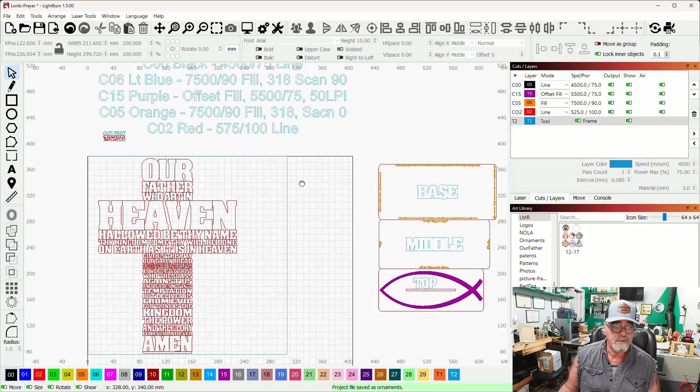Okay, so let's get started, and here we are in LightBurn, and this is the file that I was talking about. This is my save file. I put all of my notes in here. I've got my 3 parts over here, and the cross over here is the part that we're talking about. So you can see that there are different colored lines in here, different layers. Let me show you how I created this.

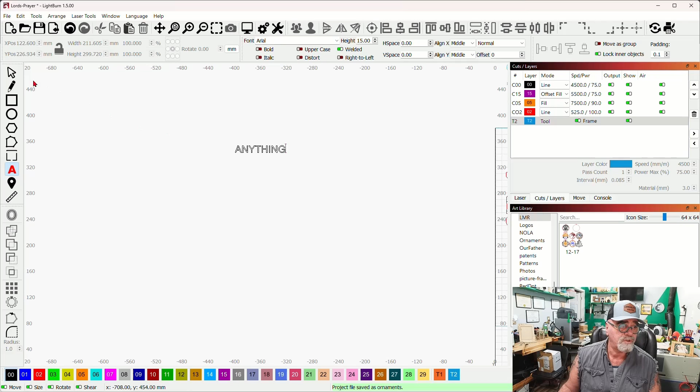So we'll move off over here. I don't actually want to open a new file, we'll just start with something else. And I'll grab my text tool and just type anything over here like that. The font that I used on this was, well, we'll just pick any one. I'll pick Anton, and let's make this a little bigger so you can see what I'm doing here.

So now we have a word, and obviously we can't cut this out. If we were to put this on our cut path, all of these letters would just fall out. So I'm going to select this word and come up here to the top, to horizontal spacing, right there. And I'm going to change this horizontal spacing by using the down arrow. Let's use the down arrow, and you'll see it's starting to shrink, and it will eventually weld.

And there you see that it's welded. But if you take a look right here, the H and the I have gone too far together. So in here is going to be an I. I'm just going to visualize that, and it's just a rectangle. So I'm going to put it back down like that, and now I have the entire word welded.

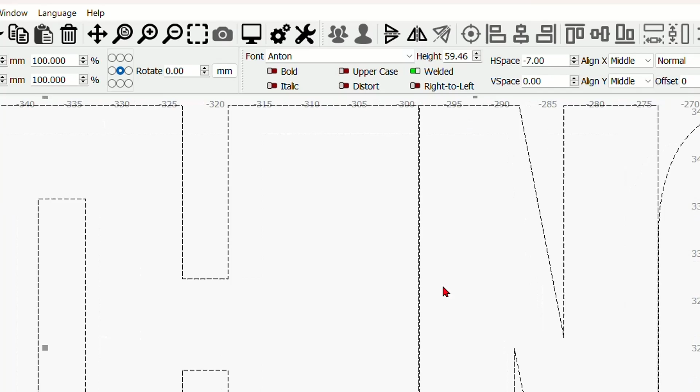But I want it to be more distinctive. So let's go ahead and make it more distinctive. Let's zoom in, let's see if we've gone far enough with the I. That will be a double cut right there, so that's no good. I have to go just a bit further, there we go, and I made a note that it's right about here is where the I is. So here comes the fun part.

So now let me put this on my cut path, because now you'll be able to see what I'm doing a little bit better. So what I have to do is now continue these letters and make it look like something you can read.

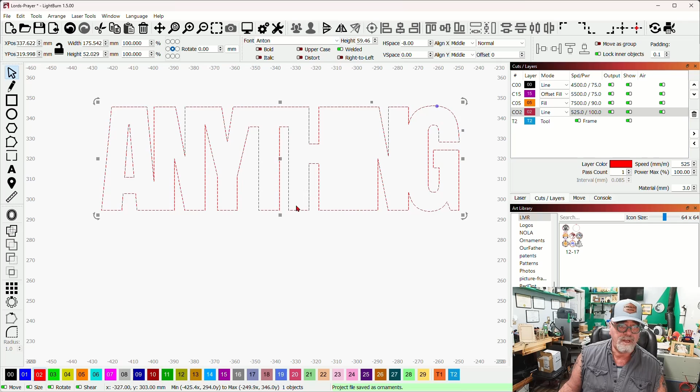So I'm going to come over here on the left side to Node Edit, and I'm going to click on Node Edit, and I'm going to just start adding nodes in here. The first thing I have to do, as you can see, there are no nodes. So I have to come up here to Edit at the top, and I have to convert this to a path, and then you'll see the nodes appear. And there they are. So now what I need to do is add my own nodes.

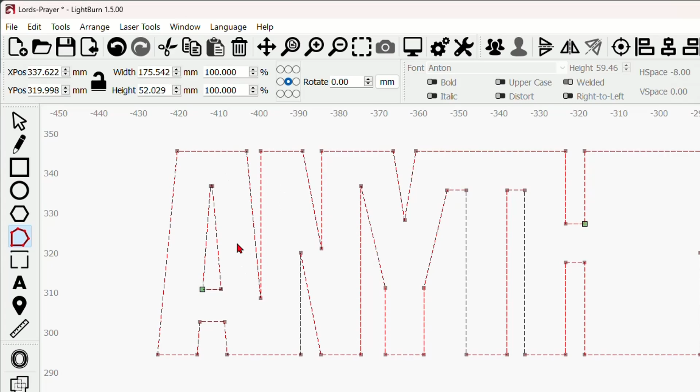So you'll see that the A stops right here. It's not actually an A. I'll zoom in, rolling my mouse wheel to zoom all the way in. And I will take the pencil tool up here on the top left, and I'll click on that, and I'll find the end of the A here. This doesn't really matter so much, because as long as you're close, that's all that matters.

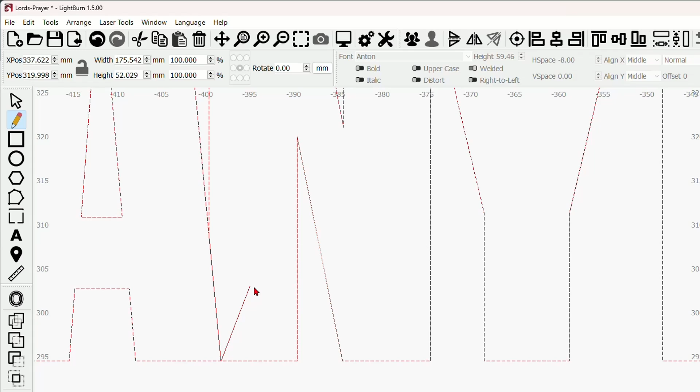And I'll come down here to the bottom. Did you see it snap to the bottom? It'll snap into a bunch of different places. And I want to make a straight line, so I'm going to click right there. Now I'm going to right click or press escape to get rid of the line tool. Now I can select that line and put it on another path, so we'll put it on the black path as an example.

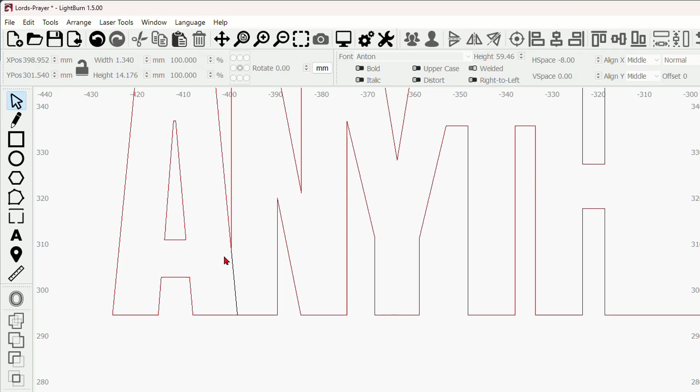Now I could have also extended the N instead. So you can do it either way. I could have extended the N, or I could have extended the A, so whichever way you want is fine. I think that the A should be a little more prominent in this one. But now let's keep going.

So if we zoom way in, we need another line over here. Back to the pencil tool. We're going to come to wait until it's a bullseye, click. And this time I want to make sure that it's perfectly straight, so I'm going to hold the Shift key. The Shift key will constrain it to go perfectly straight up and down or side to side. I'm going to click at the top and then right click to get rid of that line tool. And you see now we're getting distinct letters here.

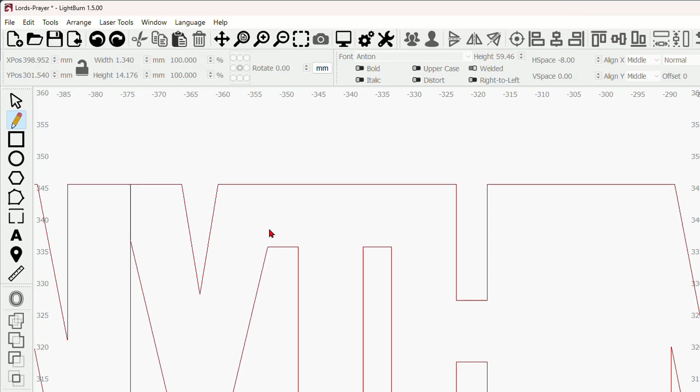And there are a couple more that have to be done. I'll do this as quickly as possible. We'll click on this one here. I'm not going to hold the Shift key. I'm going to click up there and right click to get rid of it. So now the Y is overlapping there.

I have to do the H like this. If I hold Shift, it'll constrain it. Click, right click. And now I also have to do the H over here.

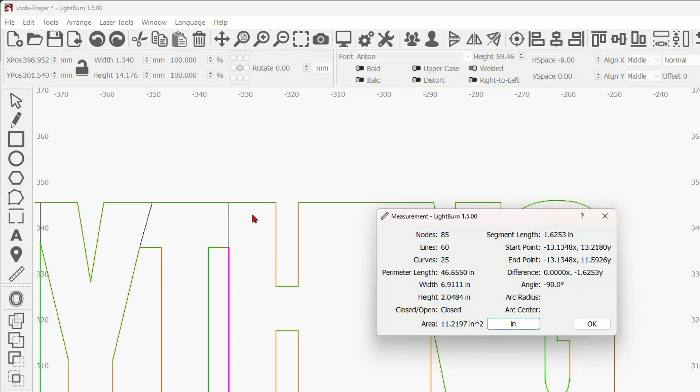So this becomes more of a guessing, I guess you'll call it a guessing. So we want to do about, if I measure this, we want to do about, let's see, from here to here, we want it to be about, let me put it back into millimeters, somewhere in the area of 10 millimeters. So say OK, all I'm going to do is draw a line up here, and then I'm going to select it.

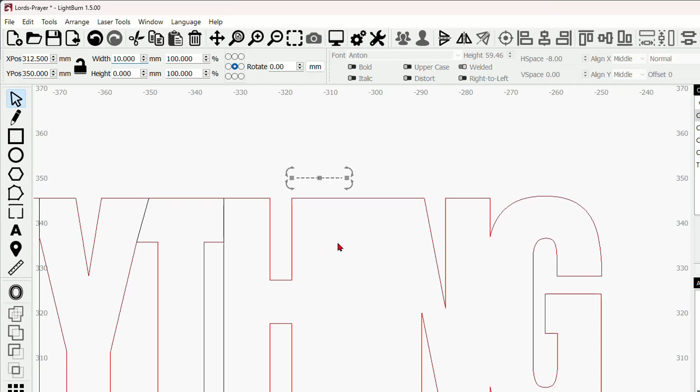I'm going to set this at 10... it's at 11 right now. Wow, that was pretty close. I'm going to set it at 10 millimeters. I'm going to use this as my guide, and I'll put this right up against the side of the H, so I know I'm making a perfect H.

Just to verify that, there's another way you can do it. You can come to the text tool and type the letter H like that. This is a secondary way you can do this, and you can drop this in right here and edit the nodes for it. So that's the second way. I'm just going to use the first way.

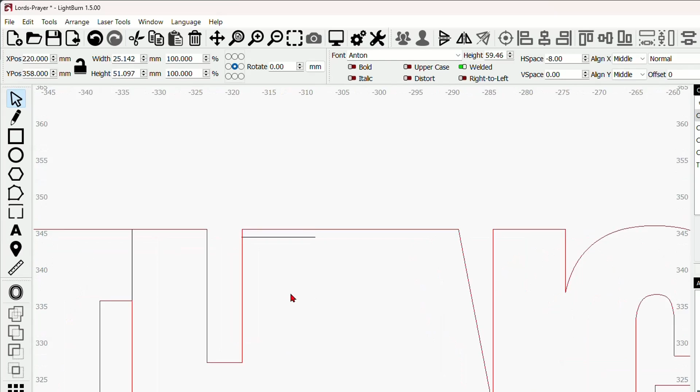I'll put that off to the side for now. So I'm going to zoom all the way in here, grab my pencil tool, and start right where that is, right there. I think that's about it right there. Now I'll zoom way out, drag the screen up by pressing the mouse wheel, hold shift to constrain it, come all the way to the bottom, click, and then right click to get rid of it. I don't need my spacer anymore because I know that's exactly where it's supposed to be.

So now we've defined that H. Now the next thing we need to do is the I. I'm going to guess that the I is going to be probably the same.

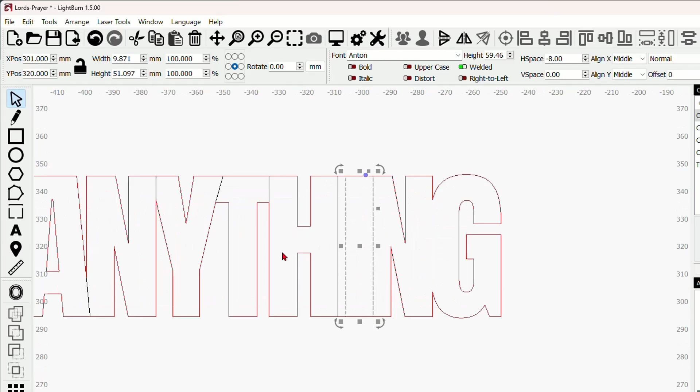Let me show you the other way to do this. We can just type the I like that, and then size it to the same size as this, which it already is because we're creating the same layers. At this point, you could theoretically dock this right up against that line. So if we grab the corner, we could snap it in just like that and leave it alone, and it'll just do two lines there, and that might be a good thing.

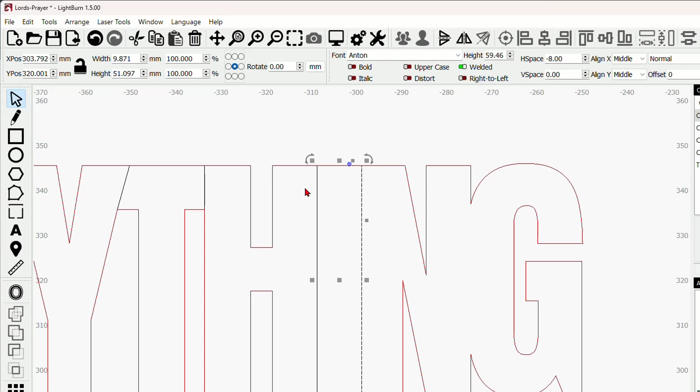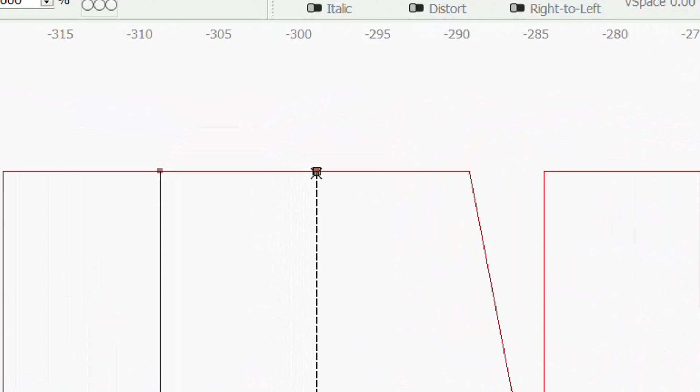But there's another way you can do this as well. You can come back to Node Edit, select the I, go to Edit, Convert to Path, and now you'll see here's our origin, and there are 4 nodes. So if I put my mouse directly over my origin, you see that node. Let me zoom in. If I press the letter B on the keyboard, it just broke that node.

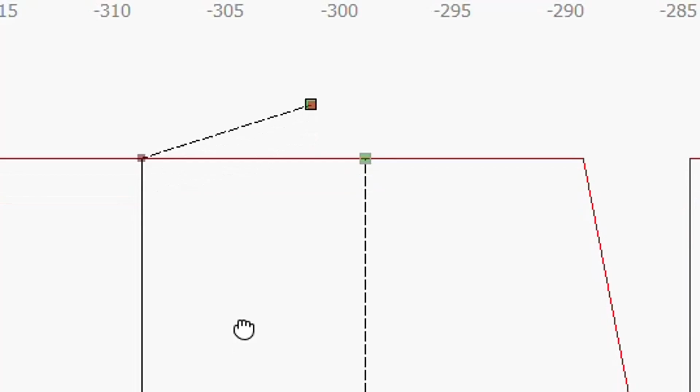So you see that? That node is broken. I can drag the other one off. And then if I come to the bottom and put my mouse over this one and press the B key on the keyboard, you'll see that this one has now broken. Let me just get this back in the right spot. So now all of these are broken.

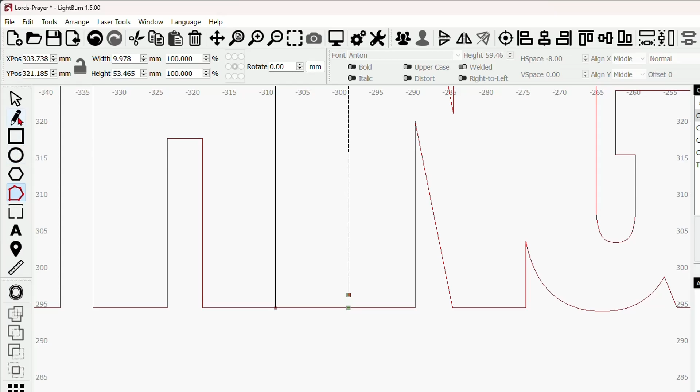I can get my selector tool, and they're all selected, so I don't want that. I just want these selected, and press the delete key. That's the second way you can do this. And here is where you might want to use an actual letter over on the end, but we're not going to.

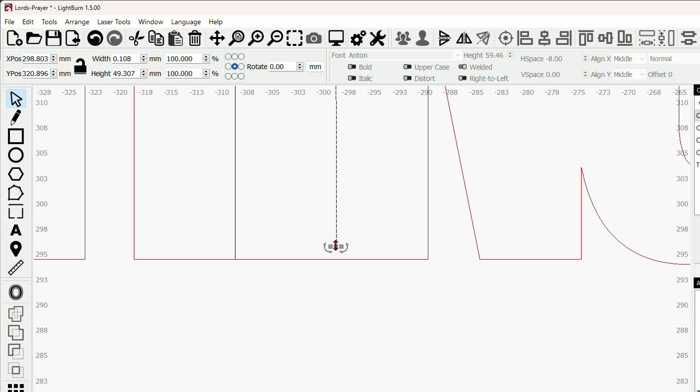So now I'm just going to select this one, grab the arrows, move it off to the side so I can see the line, and just extend it down to the bottom. So now we have an almost complete letter, and this was a good word to choose because typically right now you'd want to just do the N since we've done the right side of all of these, but I just want to show you how you do the rounded ones.

So I'll click over here with the pencil tool, come down to the bottom and click over there, and we'll pretend like we're doing the N, but we're really not. I'm going to select that one, come over to the Node Edit tool, and you'll see we now have the origin and the end. If I put my mouse anywhere over this line and press the M key, like Mary, it will put a node right directly in the middle.

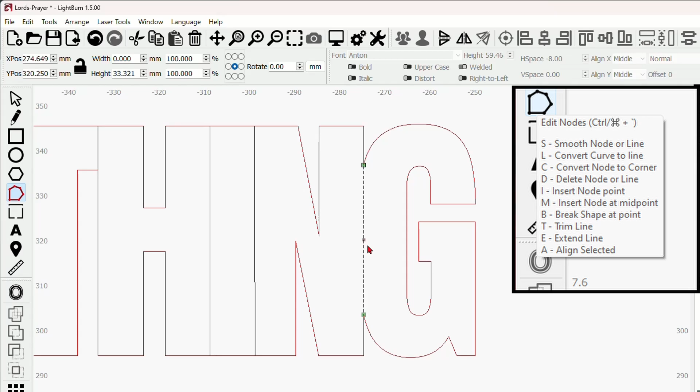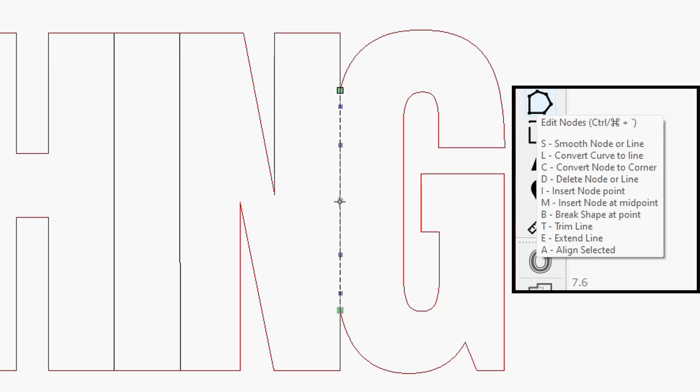Then if I put my mouse over that, I can press the S key. But you have to be careful here, because if you press S with your mouse here, it will only smooth this side. If you press S over here, it will only smooth from this node to this node. So you have to be directly over this one and press S, and that smooths everything. Now if I hold Control and grab this center node, I can shape my letter G, and however you think it's shaped, I think it's shaped something like that, right about there.

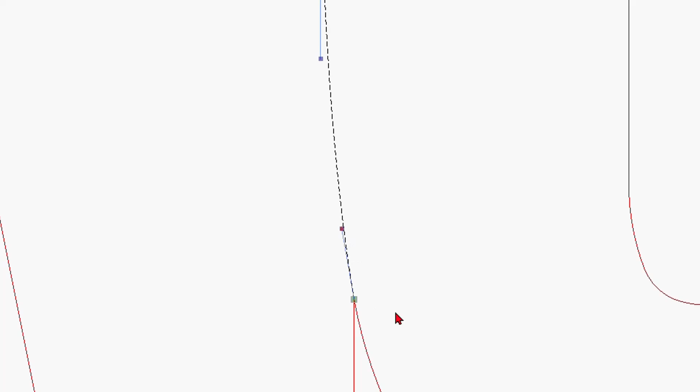I'm going to move these handles to make them a little smoother, even though this won't show up because it'll be such a small engraving. If we go to the selector tool, you can now see that we have the word anything that will actually be readable if you cut these letters out.

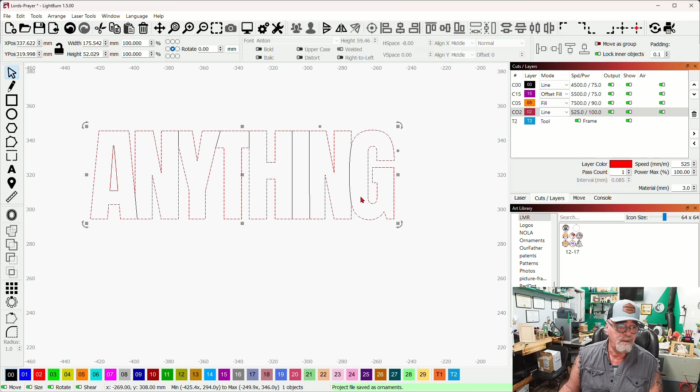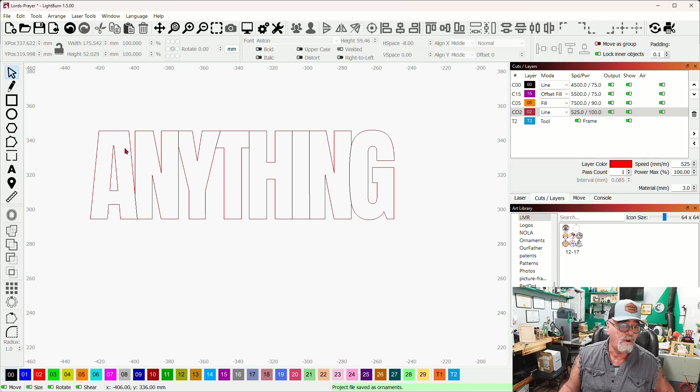So now this red line will do all of the cutting, and actually you want to have the black come first, do all of the engraving, and set the black layer to a pretty good speed and power. You want it to burn hot so that you get a good distinct line. The black line will burn all of those lines without cutting anything, and then the red layer will come back and cut everything out, and you will have one complete word that is welded together.

So now I know someone in the audience is going to point out that I did this wrong. I have the letters overlapping from left to right, and I did not do that with the T. So let's go ahead and fix that, because rather than get the comments, there are going to be people that are going to make this comment. So I'm going to fix this.

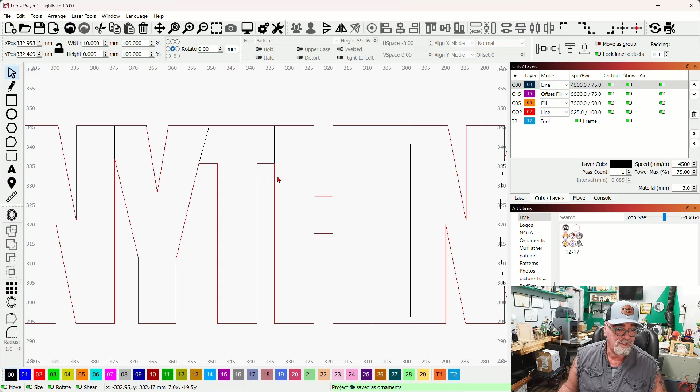I'm going to take my 10 millimeter line once again, and I'm going to draw it out right here. I'm going to select it, and set this to 10 because I know that's the width of the letters, and I'm going to use this one as my guide over here. And that is probably... no, it should be 10 millimeters. Well, you know what? This is not 10 millimeters.

So this would be a good case where I would take the letter T and use that. Oh, I see, it is an odd looking T. So I'll use the letter T as my guide this time instead, and I'll bring this in. Let me get rid of this one. And that is almost in the right spot.

As you can see, when I squish them, this is slightly different. So I'm going to hold Control and make this T the same size. Or actually, I don't have to hold Control, I'll just do this side first and this side second. And now I have the exact T that I was working with earlier.

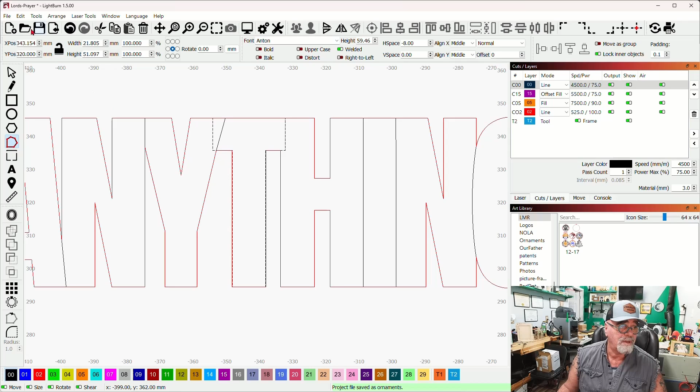So now I'm going to go back to Node Edit again. I'll go to Edit, Convert to Path, and there are my nodes right there. What I want is just this one node right here, so I'll put my mouse over that one and press the letter B to break that. I'll put my mouse over this one, press B to break that one too. Now I'll come back to the selector tool, select these, and delete them.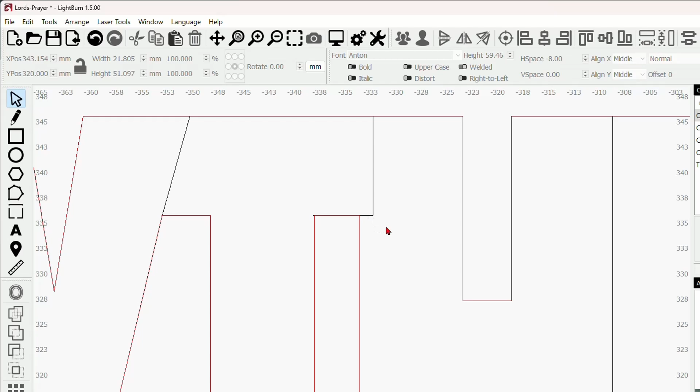And now I have what I was looking for there. So there is the actual T, and it's fixed, and now all of the letters overlap from left to right, which is the way it's supposed to be. And of course, over here, I just wanted to show you how this G works if you needed to do a smooth line, which in this case we didn't.

So what we wanted to do here was just extend this one down to here. And now that is the way that the letters should be done, with all of the letters overlapping from left to right. And I know that somebody was going to point that out, so that's the reason why I did it. And like I said, on the G, I just wanted to show you how to shape them.

Another thing too is that you can do lines like this one here, so let me show you that. You don't have to bring the letter in. So if I were to come to the line tool and start right here, now that I know about where it is, I can click there, hold Shift to constrain it, and come down to here.

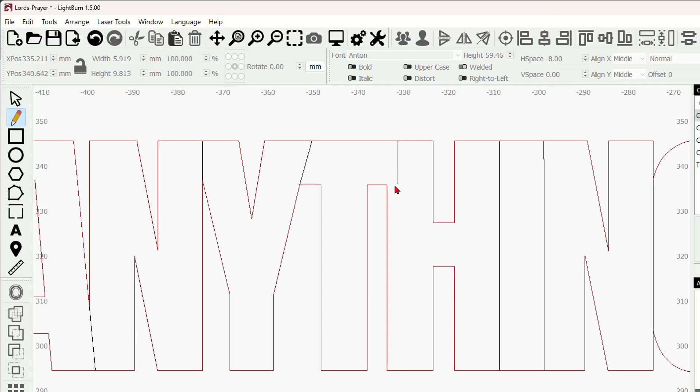Let me zoom in a little bit. I'm going to hold Shift and Control, and right about there I will click again, and now I can come over here and click again. So you can keep clicking and get the same results if you know where it's supposed to be. So the way that the line tool works is wherever you click, it creates a point, a node.

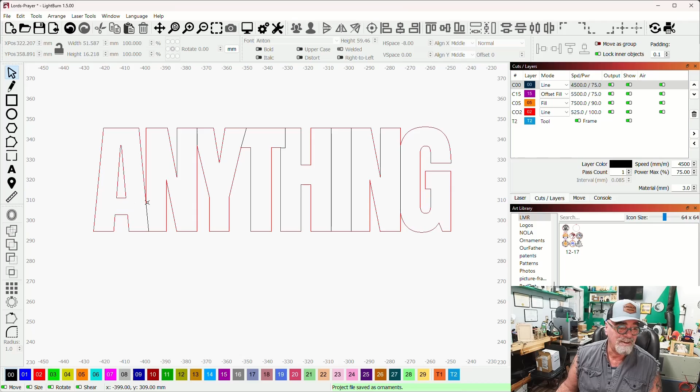So you can do this any way that you want, and you can actually click and drag as well and do some really cool things with the pencil tool. I just wanted to point that out because I knew that one of you, my viewers, are very astute to things like this. So now every letter overlaps from left to right, which is the way that this is supposed to be.

Okay, with all of that said, I want to jump back over to the file and show you a little bit more about this file that you can get at my store, engraveandcutfiles.com. Let's jump over into LightBurn real quick.

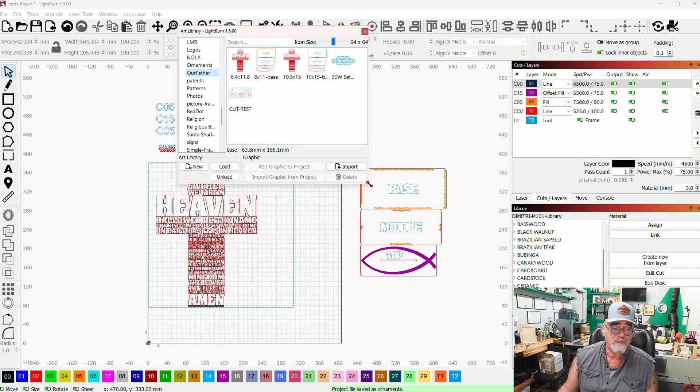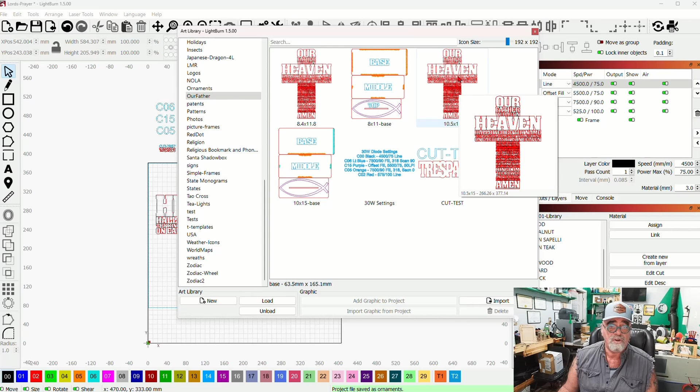I have created an art library called Our Father, and in this library are all of the files. We've got the 8 by 11 file, with the base, the middle, and the top, designed for 3mm wood. We've got the 15-inch, the 10 by 15, which will fit on all 400 by 400 or larger lasers, or even some smaller.

And we've got the base for the 15-inch over here. The only difference is that the line in the middle here is a different width, that's all. Then I've got the settings, which were for me personally for the 30-watt diode laser, and I cut back the speed quite a bit.

I would also suggest that whatever cut speed your laser can cut at, this particular laser was able to cut 3mm wood at about 750, and I scaled that cut layer way back to 575.

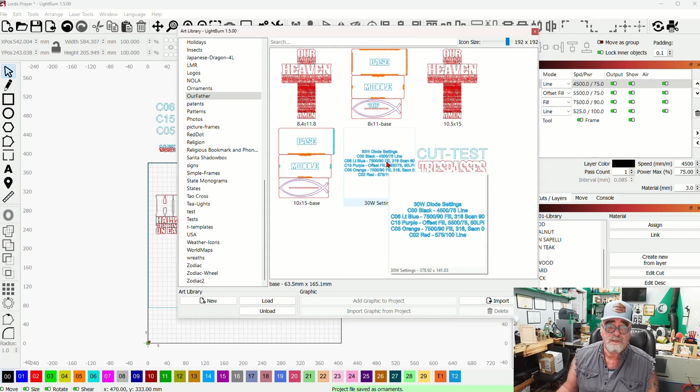I took that number way down because of all the intricate cuts. I want to make sure every piece, no matter how small, drops out. There's also a cut test in this library, so let me show you a little different way here.

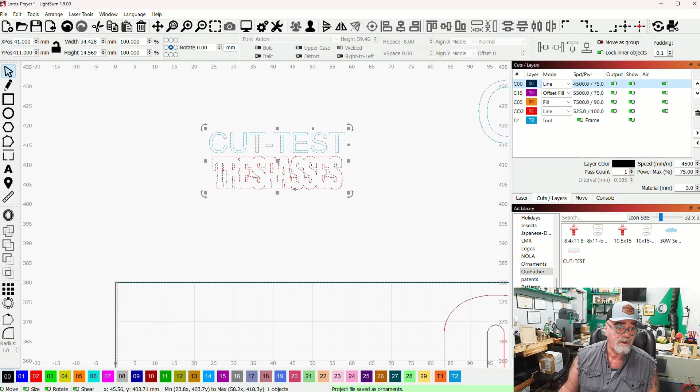If we start up here at the top and double click on that cut test, for example, brought it out to the laser, this is what would come out right here. The blue is just the tool layer, you don't have to worry about that, it's just naming what the actual file is.

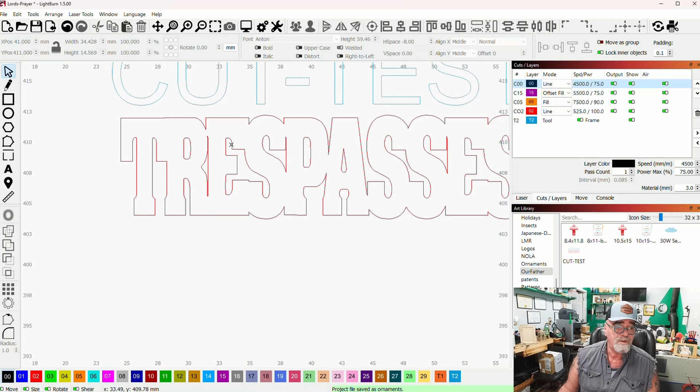But if we zoom way in here, you'll see I've taken the word 'trespasses' and made this the actual size, so you can test without wasting too much material these little cutouts, to make sure they're going to drop out cleanly and you don't have to fiddle with poking all the pieces out.

So if we come down here, I took the smallest letters that I had, which is right here, 'trespasses,' and you'll see that if I bring this over here, it fits right over that. These are the smallest letters in this file.

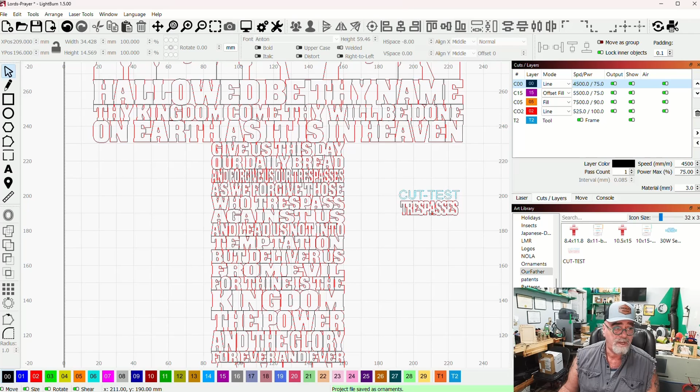So you can run this cut test, which is only 1 inch by a 1/2 inch. That way you don't waste material, you can use some scrap wood and test it, and make sure you can cut this before you start.

The other thing you have to make sure of is that you want your layers that are going to engrave here to cut first. Let me show you those. Let me turn off the others.

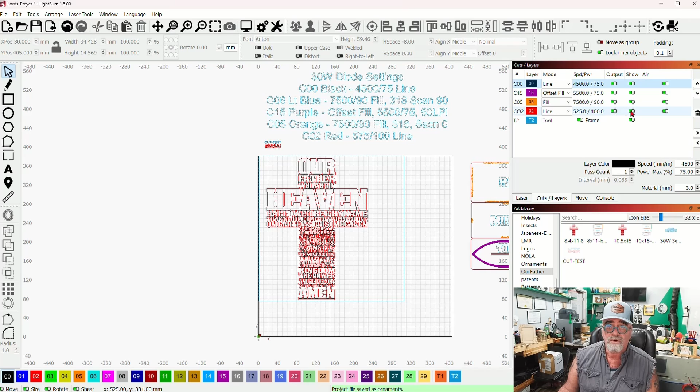So there are 300 and something engraves in here. This is a very complex file, but your laser will have no problem running it. That is the first layer, which is going to be the engrave layer.

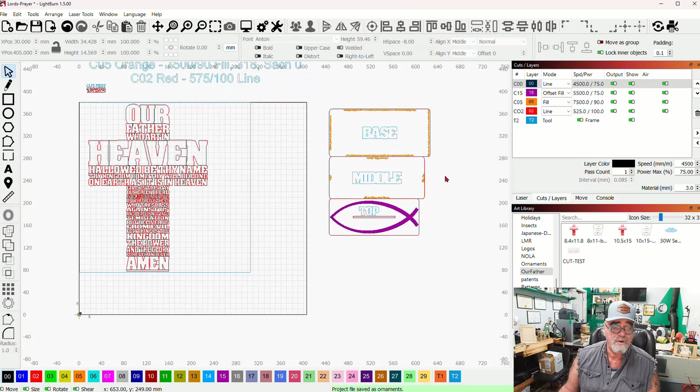The second layer is going to be the cut layer, so I can turn that back on and it'll come back and cut all of that out. When you bring these files over, there's a lot of small detail on here.

Again, these are just names, they're on a toolpath, they're not going to cut. I've got a few things in here. So here is the cross of the Trinity, in the name of the Father, the Son, and the Holy Spirit.

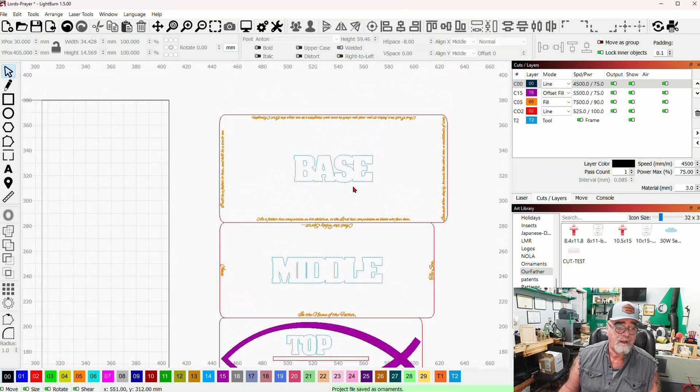Amen. Going around the outside of the middle layer, around the outside of the base layer, this is the Our Father prayer, and it goes all the way around. There's just a few quotes here that go all the way around. It actually comes out really, really nice.

Plus, it gives you a way to position your layers. So you would start with this base layer, then you'd put this middle layer on top of the base, and then this is the very top layer here.

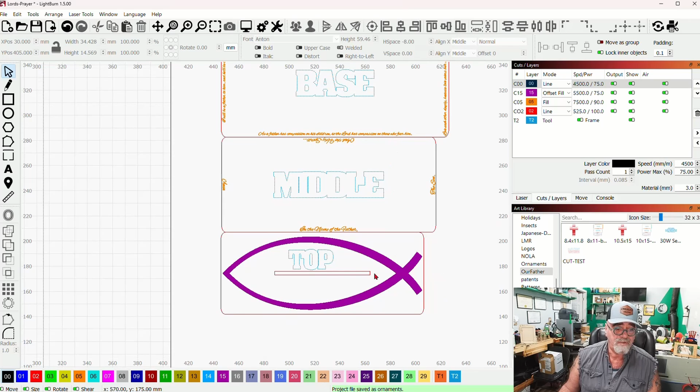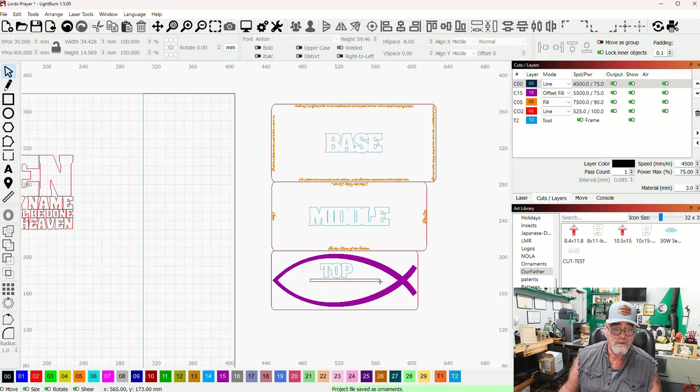There are two of these, one for the 8-inch cross and one for the 15-inch - I'm sorry, 8 by 11 and 10.5 by 15 is the larger one. The only difference between these two in the library is that this little cutout for the cross to fit into is a different size.

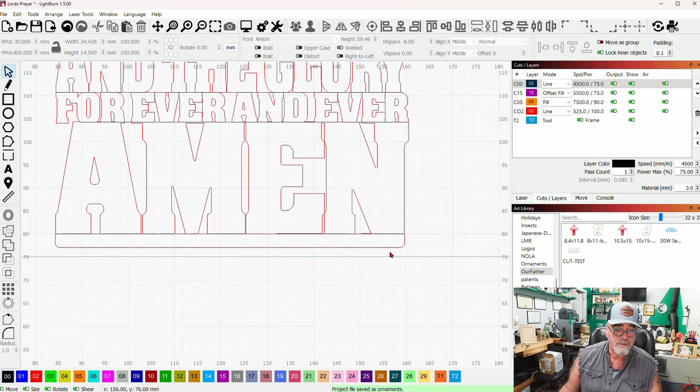That's all, it's a different width. Down at the bottom, across the bottom, there will be a score line that comes all the way across in black, and that score line is just so when you fit this into the base, you can see how far down it has to go and make sure it's level so it's standing straight and doesn't rock. I've rounded the edges of the bottom so that it will fit nicely into that slot.

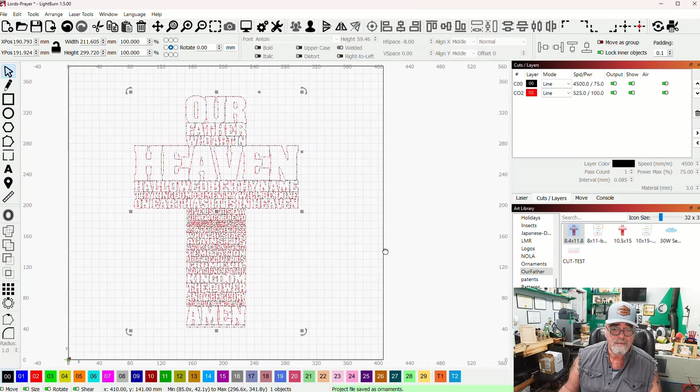This is the entire library. If I were to select everything and delete it, then come back over and go to the library, if I'm doing the 8-inch cross, I would just double click on the 8-inch and get that out. Then the first thing I would do is bring out this cut test. Then I would do the 8-inch, let me make this a little bigger so I can see it better, and then double click on the 8 by 11 base so I have the 3 bases over here off to the side.

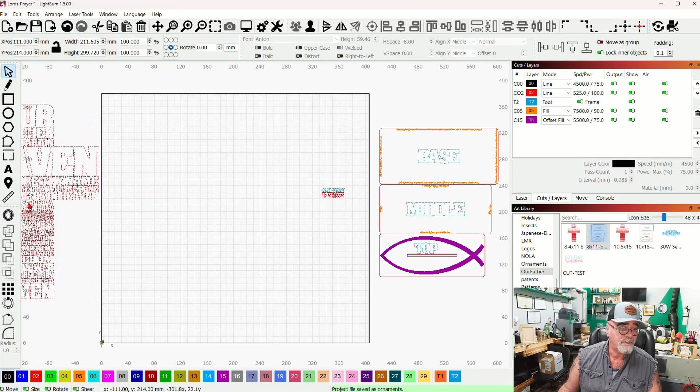So I would take this cross, move it off to the side, take this cut test and put it somewhere on my workbed, let's say right about there. And that is the first job that I'm going to run.

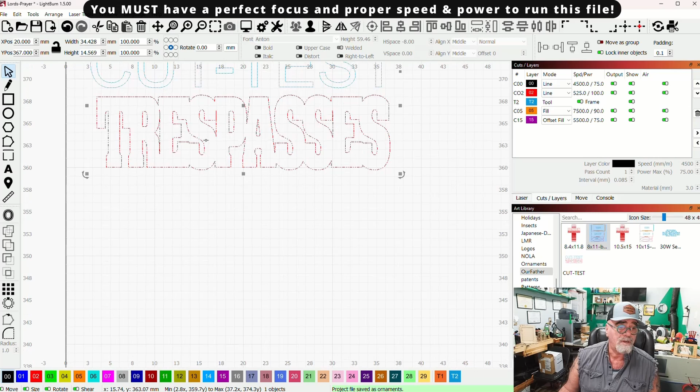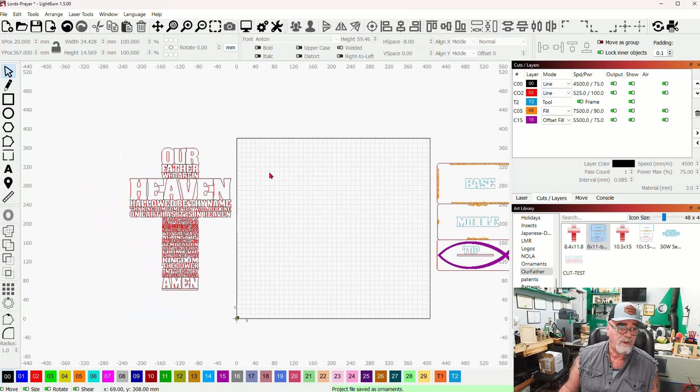If all of these letters cut out cleanly and all of these pieces drop right out, you may need to use a little X-Acto knife to poke out the smaller pieces. But if this all cuts out cleanly, this little part here drops out, and this little part, where you can just pop them right out without having any chads or problems, then you can go ahead and delete this and bring in your cross and start cutting it out. That would be the second part of the job. Then finally you do the 3 pieces for the base, and that's it.

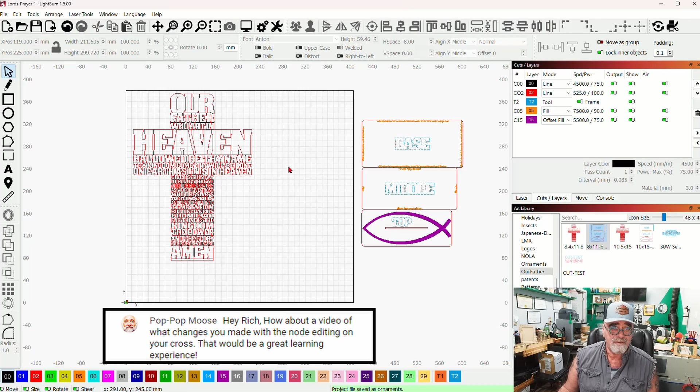Someone did ask me on the LMR, the Laser Makers Realm, last Sunday. We did a live stream, and Pop-Pop Moose asked me if I could do a video on how to create all of these distinct lines here, and that's the purpose of this video today. So thank you, Pop, this video is for you.

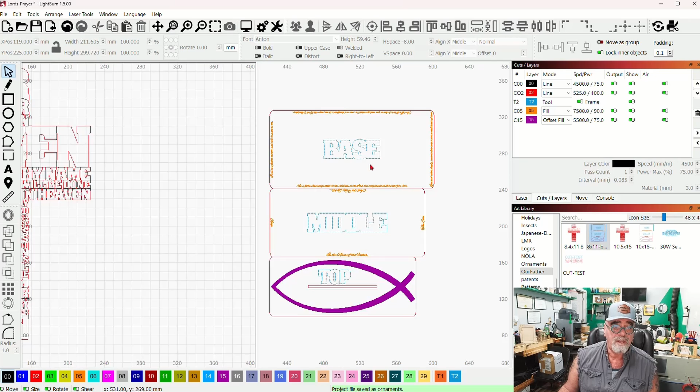When you glue these pieces together, you're going to start with the base. I usually put 4 dabs of glue, little dots, then a big circle in the middle of the glue, put the middle piece on top of it, and use this text as a guide so you can position it in place. Put 2 clamps on it, one on either side. Then you can do some fine positioning using your thumbs, just getting it in the perfect spot.

Once it's in the perfect spot, leave it for 3 or 4 minutes until it tacks. Most wood glue will tack in about 3 or 4 minutes. You can use wood glue or Elmer's school glue, and I always choose clear glues, because in case any of it seeps out on the side, it'll dry clear and you won't see it.

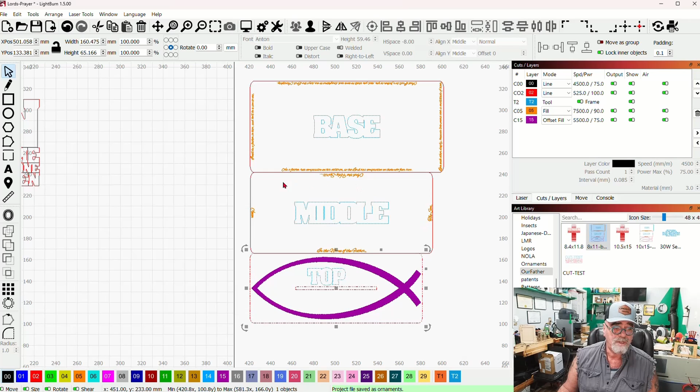Once you've got that one in place, then you're just going to take the final piece, put it on top of this one, and use the same text to position it with the same 2 clamp method. Once you've got everything positioned and tacked up after 3, 4, 5 minutes, then you can put more clamps around the outside of the whole piece.

There you go, that's the entire project right there. I hope you take advantage of the file. This happens to be a fantastic file. Everyone that's seen it in the last week has wanted one.

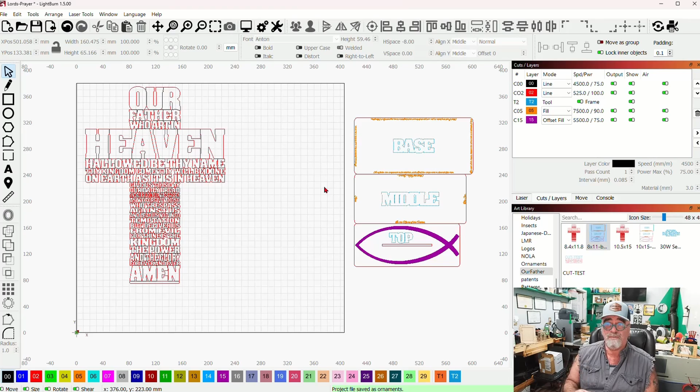So I am right now running these off in the shop next door. Not right this moment, but after this video, I will go back and run the next one. I think I've got 7 of them to do right now that people wanted, and specifically said, don't get me a Christmas gift, I want one of those.